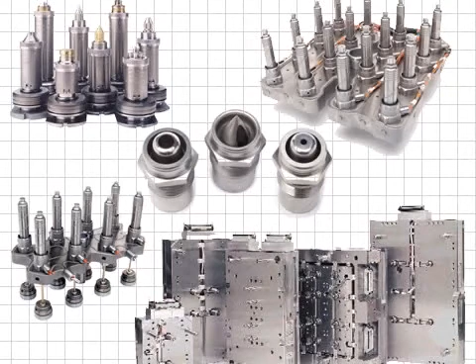In this lesson, we will discuss the various nozzle and gating styles available in hot runner systems today, including the open or sprue gate, hot tip gate, and valve gate methods. We will also examine the methods used to control the temperature in the nozzle and gate area.

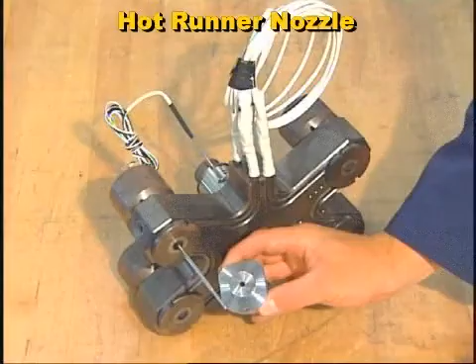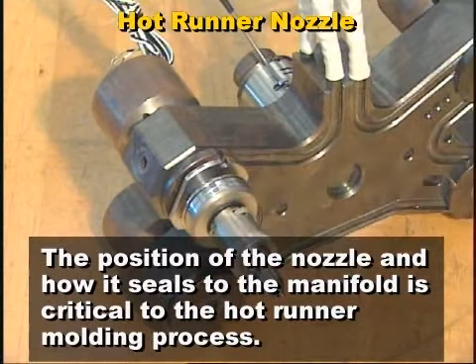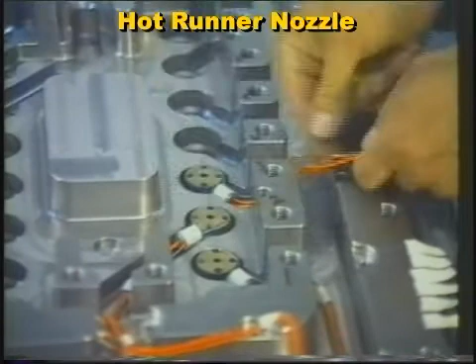The hot runner nozzle, also called the hot drop, is the connection between the manifold and the mold cavity. The position of the nozzle and how it seals to the manifold is critical to the hot runner molding process. If a nozzle is not positioned correctly, it can result in nozzle and gate damage, along with material leakage. Nozzle sealing is accomplished by spring force, thermal expansion, or by directly bolting the nozzle to the manifold.

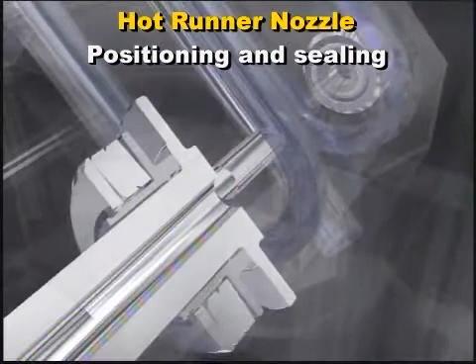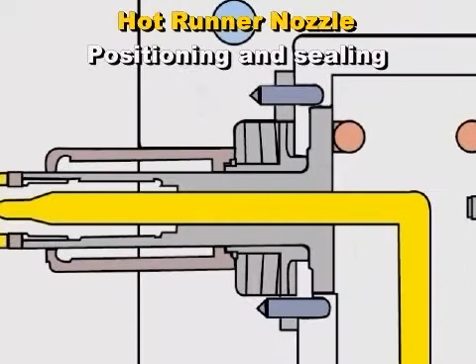Virtually all nozzles have some alignment feature, usually a high tolerance surface in the gate detail, used to ensure that the nozzle tip is aligned properly with the gate. During heating and cooling, the top of the rigidly attached nozzle moves as the manifold contracts and expands. There must be a robust seal between the nozzle housing and the manifold.

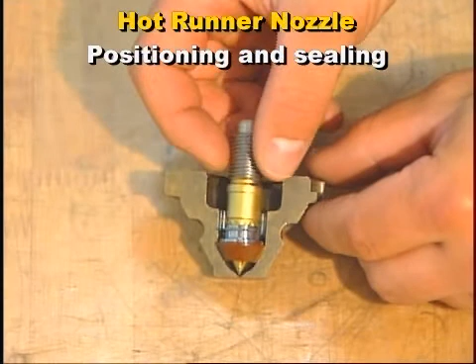Most hot runner nozzles utilize thermal expansion to provide the primary seal between the nozzle tip and the gate insert. Failure to run a hot runner at the recommended mold and nozzle temperature could lead to seal failure, resulting in damage or plastic leakage.

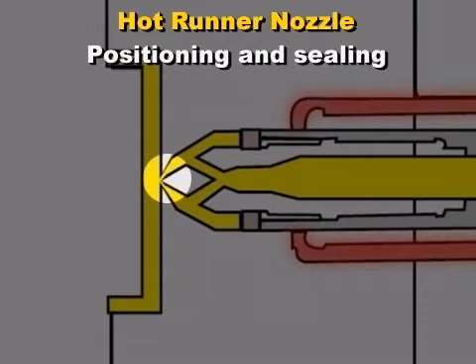The amount of thermal expansion is critical as it generates the force that prevents leakage between the nozzle tip and gate. Too much force may damage or deform the metal here. Too little and plastic leakage may result.

The nozzle must be heated to maintain the melt temperature. There are two primary techniques for heating the nozzle: indirect heat and direct heat.

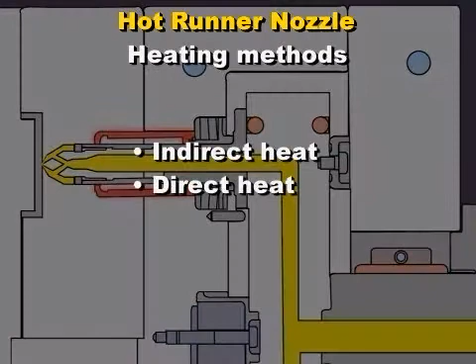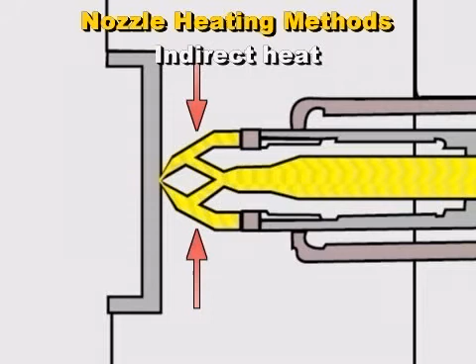If the nozzles or drops are heated indirectly, they do not have a specific nozzle heater, but rather rely on conductive heat from the manifolds as their primary heat source. Heat is conducted from the manifold metal to the nozzle housing to the nozzle tip. The nozzle material has to be highly conductive to transfer this heat efficiently.

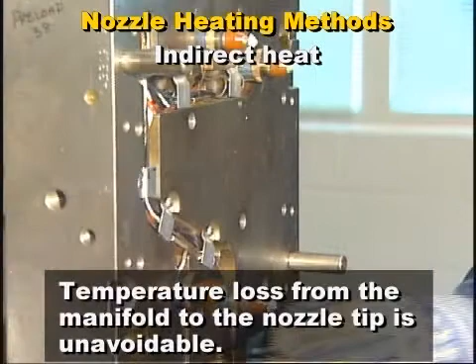Some manufacturers use heat pipes to improve the conductivity to the nozzle. These highly conductive inserts work to evenly distribute the heat provided by heaters in the manifold. With indirect heat, however, some heat loss along the length of the nozzle is unavoidable. This results in a lower temperature at the nozzle tip as compared to the base of the nozzle.

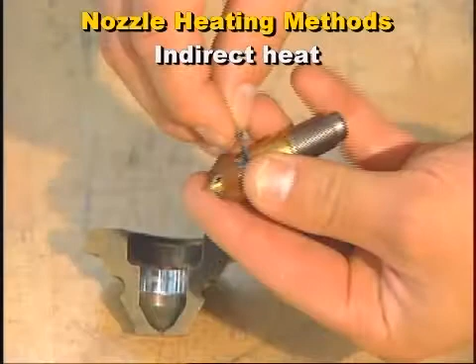In addition, the nozzles have to be insulated, especially in the tip region, to minimize heat loss to the cavity. Indirectly heated nozzles are recommended only when molding plastics with a wide processing temperature window, as precise temperature control is difficult.

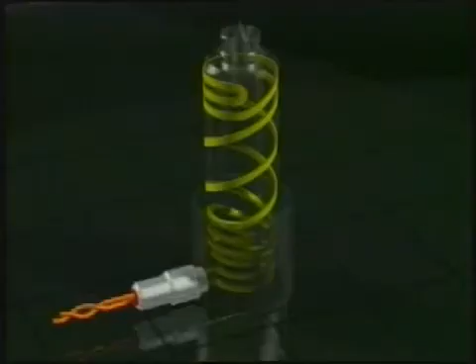Directly heated nozzles have individual heaters. This method of heating is extremely effective because within each drop, the temperature can be controlled right up to the nozzle tip to provide a higher degree of process adjustability and repeatability.

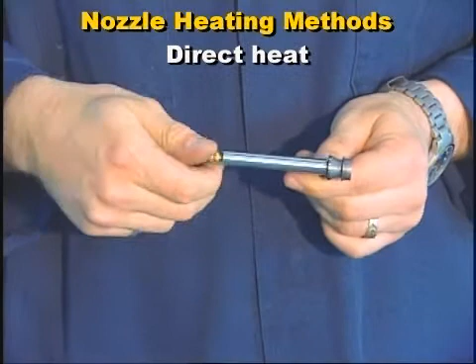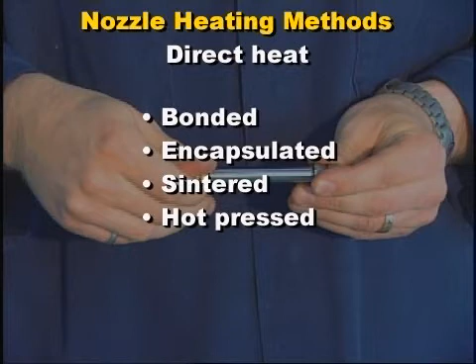There are several ways this heating element can be connected to the nozzle body. The element can be bonded, encapsulated, sintered, or hot pressed into a milled groove in the nozzle body. Some types of nozzles will have heater bands secured directly to the outside of the nozzle body. This contributes to good temperature uniformity.

Whatever the design, temperature uniformity in the nozzle is critical, particularly when molding engineering plastics with a narrow process window. Direct heating uses more heating circuits to provide separate temperature control of each nozzle, allowing the molder to fine-tune and optimize the process.

However, the additional wiring required for direct heated nozzles is more complex, presents more potential failure points, and can be more expensive than the indirectly heated nozzle type.

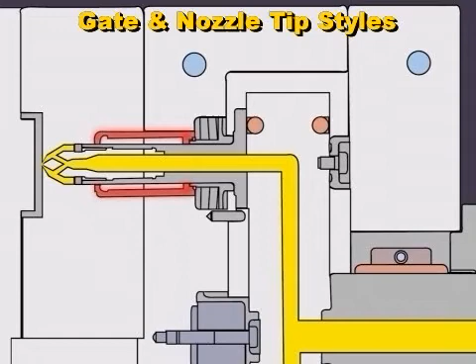The gate area is where the plastic part and the nozzle tip meet. The term gate is also used to refer to the specific type of nozzle design. There are two basic types of hot runner gates available: the open gate, also called a thermal gate, and the valve gate system.

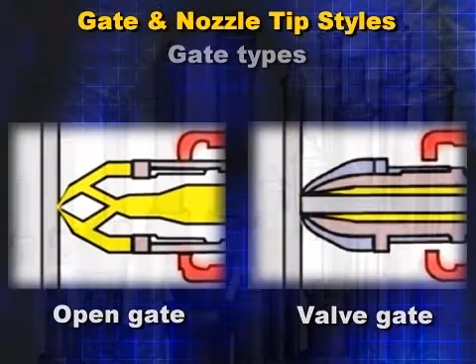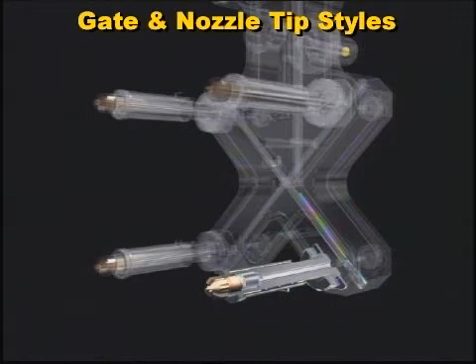Within these groupings, there are literally hundreds of gating options available, depending on the part design, material type, desired gate vestige, and other factors. The design and temperature control of the nozzle tip and gate area is critical in hot runner molding. Let's examine the characteristics of each gate type.

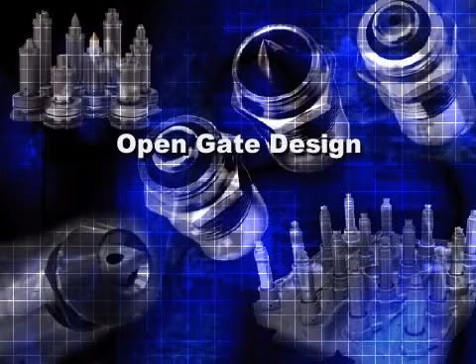The open gate design, sometimes referred to as a thermal gate, uses precise temperature control of the nozzle tip to melt the plastic in the gate each cycle. The gate remains open for plastic flow during the filling and packing phase of the injection cycle. Then, during the holding phase, the plastic within the gate cools sufficiently so that it freezes, acting as a plug.

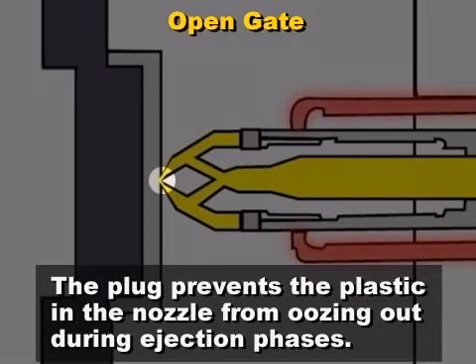This plug prevents the viscous plastic contained within the nozzle from oozing out into the cavity during the mold open and ejection phases. The gate is also the break-off point.

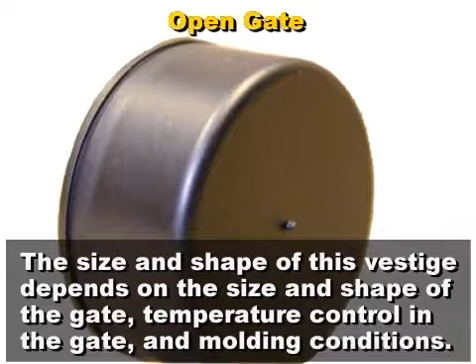At the time of part ejection, some of the gate material remains with the finished part and creates a vestige. The size and shape of this vestige is dependent upon the size and shape of the gate, temperature control in the gate, and the molding conditions.

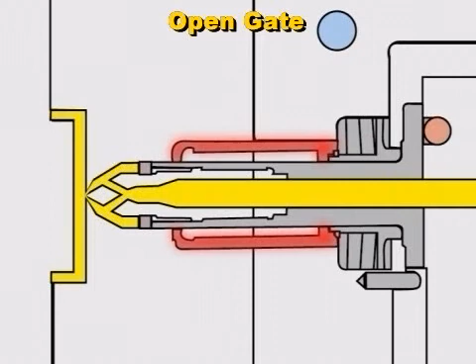When injection pressure is applied to the melt at the start of the following cycle, the rise in pressure forces the plug into the cavity, remelting it as the cavity starts to fill. Due to shear heat generation, the actual temperature of the nozzle tip will increase as the melt flows through it. This particular gate type is often referred to as a hot tip or pinpoint gate.

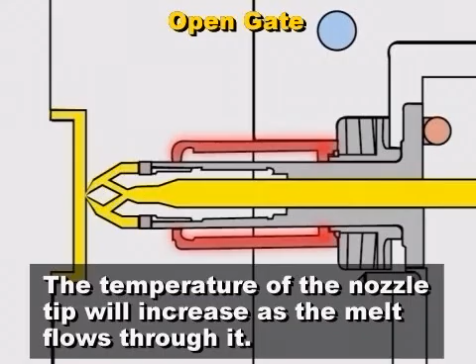The melt and nozzle tip temperature in an open gate system can sometimes be a difficult temperature control problem. The temperature of the mold steel and the hot tip can be several hundred degrees apart. It is often necessary to insulate this area to prevent heat transfer.

Titanium alloys are also used as a thermal insulator where low thermal conductivity is required. Designs that provide temperature insulation through air gaps or solidified plastic can be an alternative.

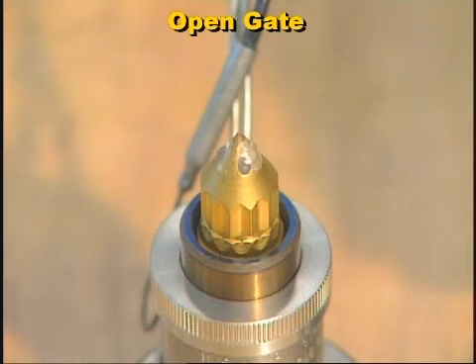Conductive materials such as beryllium copper are used to conduct heat from the nozzle heater to the tip and maintain the desired temperature at the gate. Selection is critical in the design of nozzle tip components.

Materials with low thermal conductivity are used where contact is necessary with the mold, but minimal heat transfer is desired. Materials with high thermal conductivity, such as copper alloys, are used to conduct heat from the nozzle into the gate area.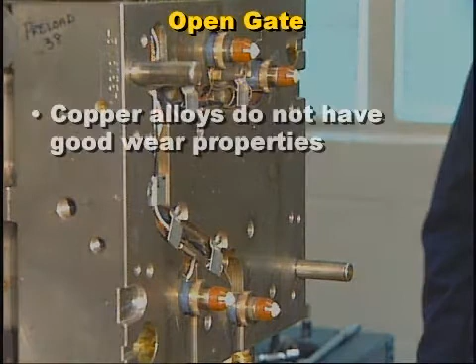Copper alloys, however, do not have good wear properties and tend to be worn away over time. Tungsten carbide alloys are used where good thermal conductivity is required in conjunction with excellent wear properties.

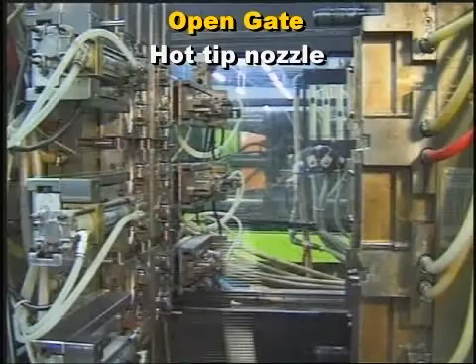This is a hot tip or pinpoint nozzle tip. It provides acceptable gate appearance for many applications. The hot tip is commonly used for caps and closure applications, but can also be used for larger parts.

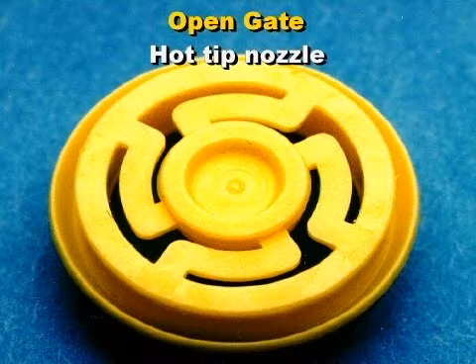This type of nozzle tip will typically leave a small gate vestige on the molded part. Smaller gate sizes will give reduced gate vestige, but will also subject the material to more shear and require increased injection pressures.

The hot tip relies on good nozzle tip temperature control as well as adequate gate cooling to optimize gate appearance.

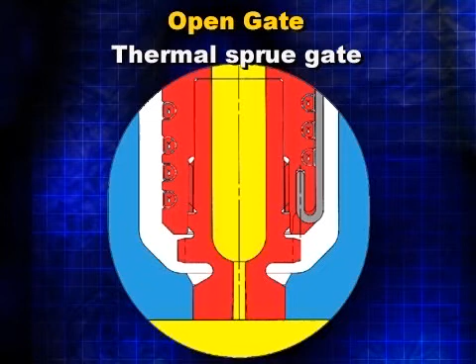The thermal sprue type gate, sometimes called a hot sprue, relies on cooling in the mold to freeze the gate. This will result in a larger gate vestige that looks like a small sprue.

The thermal sprue gate is commonly used to feed into subrunners or other components where gate appearance from the hot runner is not as critical.

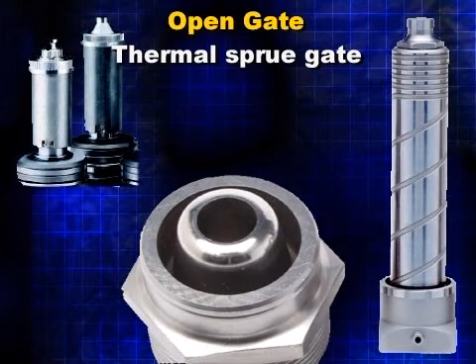It subjects the material to a minimum amount of shear heat generation and pressure drop. This type of gating is not recommended for materials that have a tendency to string, like polyethylene, polypropylene, and polystyrene.

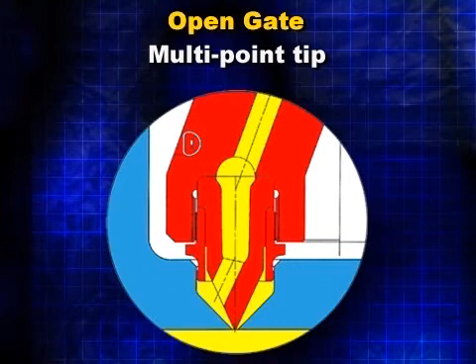The multi-point tip provides several hot tip gates from a single nozzle. These can be used to gate several parts, usually smaller parts, with one nozzle, or to provide several gates onto one part.

It is commonly used to mold components such as gears, where concentricity is critical. This gate type has only one zone of temperature control for several gates, which can limit processing options.

The edge gate or side gate method provides an open thermal gate into the sidewall of the part. The gate is sheared from the part as the mold opens. The part design must be suitable to provide a clean shearing action.

Good temperature control in the gate area is also required. A cold slug forms in the gate, preventing gate drool. On the next cycle, injection pressure forces the plug into the cavity, remelting it as the cavity starts to fill.

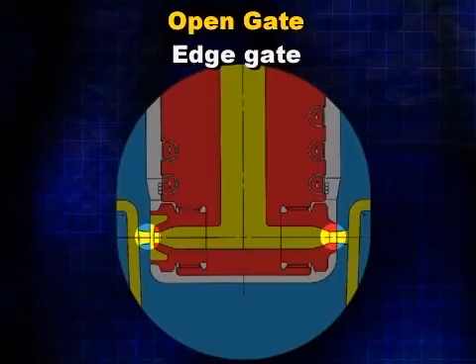The control of gate solidification is influenced by the properties of the plastic. For example, different gating techniques are required to process semicrystalline and amorphous plastics.

Semicrystalline materials have a higher melt temperature, so generally the nozzle must supply more heat to the gate area than for amorphous plastics.

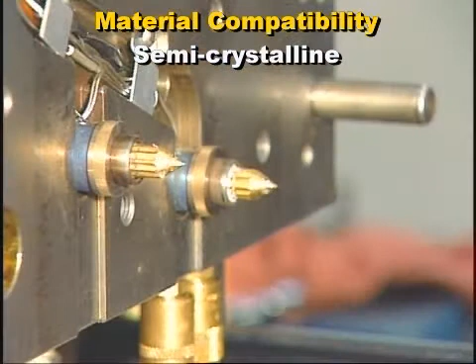Because semicrystallines melt and solidify with a narrow temperature range, it is important that the nozzle tip temperature be kept as constant as possible.

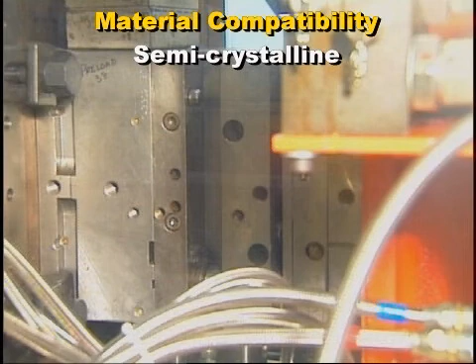If allowed to cycle above and below the melting point of the material, plastic may solidify in the gate. This is extremely critical when molding with a filled type semicrystalline material.

Common semicrystalline materials include polyethylene, polypropylene, nylon, acetal, and PET.

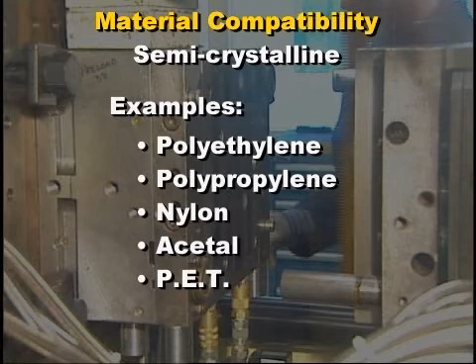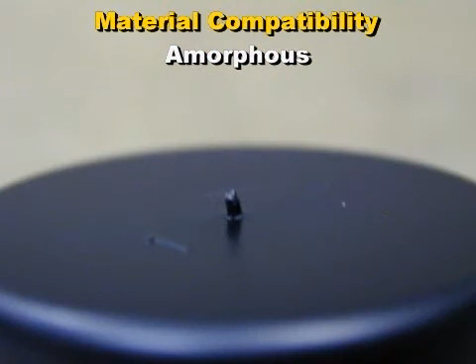When molding an amorphous material, the gate area should be thermally insulated from the nozzle and nozzle tip. Otherwise, heat transfer from the nozzle to the gate area will delay solidification of the amorphous material, leading to defects like gate stringing or increased gate vestige.

Common amorphous plastics include polycarbonate, polystyrene, and ABS.

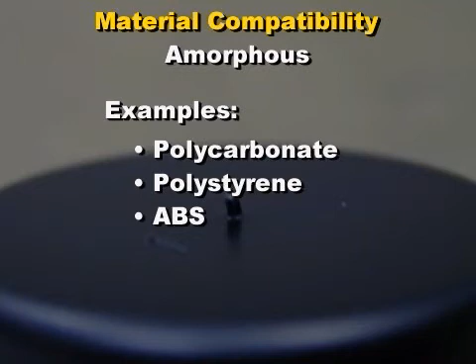Valve-gated hot runner systems offer the molder the optimum in flow control. The valve gate is often used for fill sequencing, processing foamed materials, gas assist molding, or where minimal gate vestige height is required.

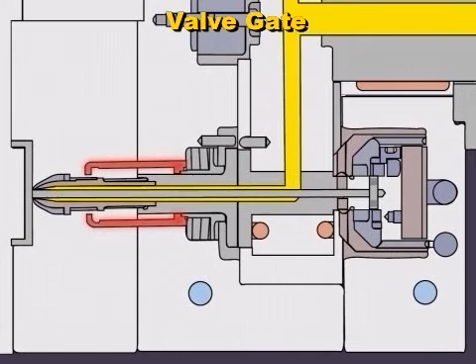A valve gate uses a pneumatically or hydraulically operated valve stem to mechanically open or close the gate. The gate opens at the beginning of the injection stage and allows the viscous plastic to enter the cavity.

When injection and packing are complete, the valve stem piston is actuated forward. This shuts off the resin flow and the tip of the valve stem effectively forms part of the cavity surface.

The result is a circular gate vestige, the same size as the gate diameter, that looks similar to an ejector pin witness mark.

The valve stem tip never actually makes steel-to-steel contact. There is always a thin film of plastic left between the pin and the gate.

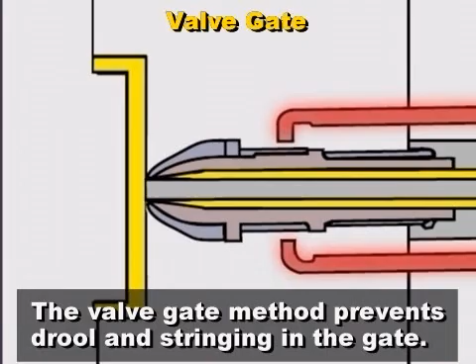The valve gate method also prevents drool and stringing in the gate. In addition, the physical properties of the molded part are improved with the use of a valve gate.

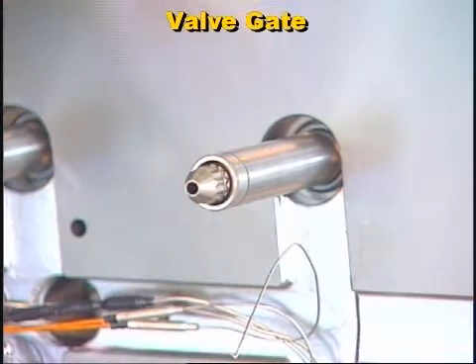Due to the larger gate opening, valve gates provide easier part filling and generate less shear than thermal gates. Also, the holding pressure can be applied and controlled for a longer period of time, resulting in more uniform packing. The result is a part with less warpage and improved physical properties.

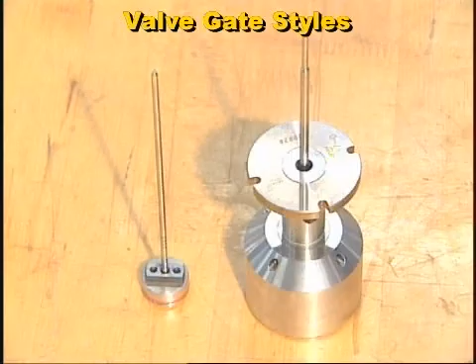There are two basic types of valve gate seals, tapered and cylindrical. Each type has a different method of sealing the gate.

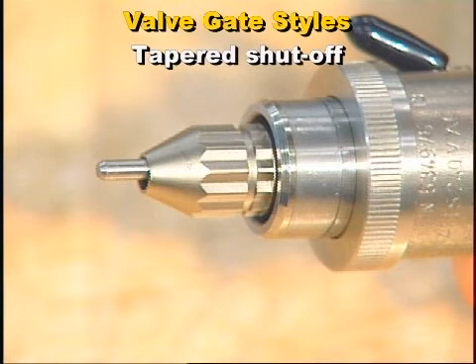Let's first examine the tapered shutoff system. Here, the tip of the valve stem is ground at an angle that seals to a matched angled surface in the gate insert.

As the valve stem moves forward, the melt caught between the valve stem and gate steel is compressed and forced to flow out of the gate. A seal is formed between the valve stem tip and the gate insert.

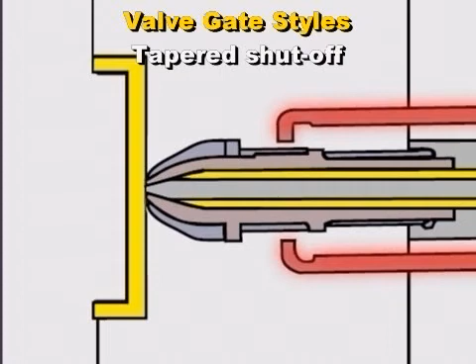The forward stroke of the valve stem must be limited with a physical stop to prevent damage to the gate insert from the valve stem hitting it.

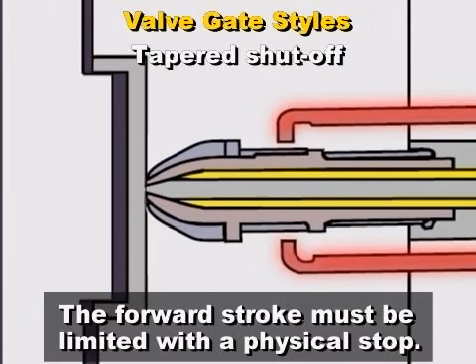With a cylindrical valve stem seal, the valve stem creates gate shutoff without metal-to-metal contact with the use of a tight tolerance slip fit in a cylindrical gate.

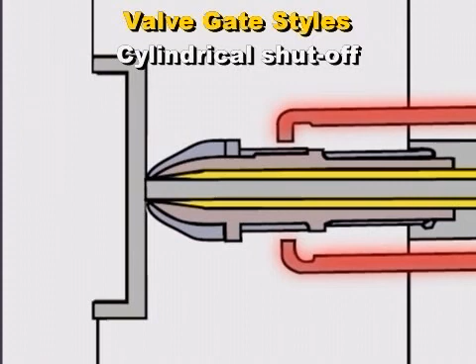When the stem moves forward, it acts as a plunger, forcing the melt from the gate opening into the cavity. This gating style relies on the tight tolerance between the valve stem and gate opening for the superior gate quality.

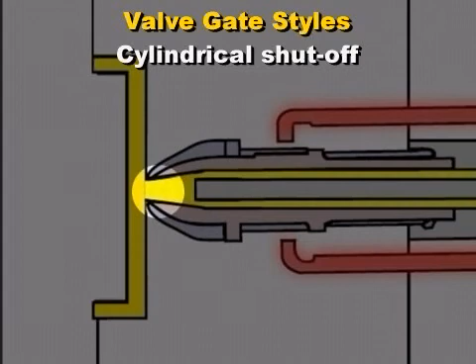This feature also minimizes any gate wear and allows up to 10 million shots without any gate repair. Besides minimized wear, the cylindrical type shutoff allows for unsurpassed optical gate appearance.

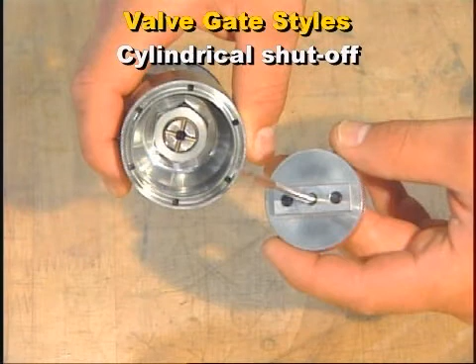The cylindrical sealing, however, is more sensitive to wear if the required tolerances are not maintained, causing rapid degradation in gate quality as the wear increases the size of the gap between the valve stem and the gate steel.

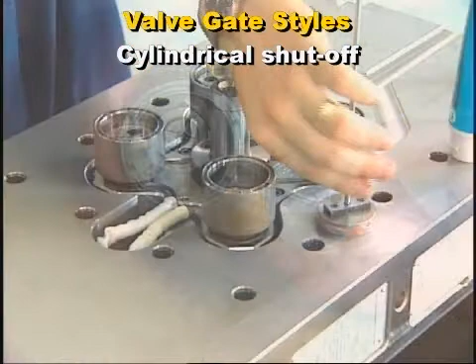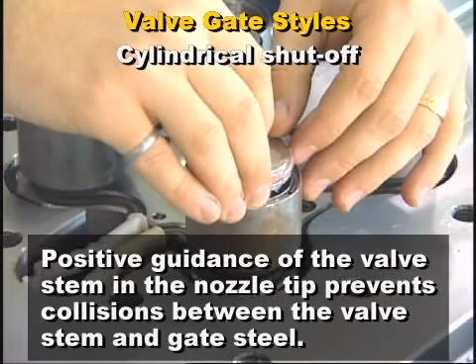Therefore, cylindrical seal valve gates require precise alignment of the valve stem to the gate in order to reduce wear. Ideally, positive guidance of the valve stem in the nozzle tip prevents collisions between the valve stem and gate steel.

Valve gate nozzles can also reduce cycle time, especially when molding large parts. Since the valve, and not the molding machine, holds pressure on the cavity, you don't have to wait for the gates to freeze, and melt plastication can begin sooner.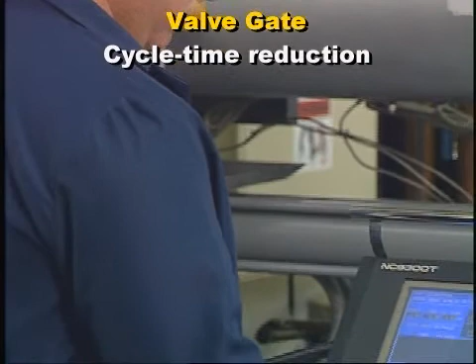With the open or thermally gated nozzles, the gates must be sufficiently frozen before hold pressure can be released and screw recovery can begin.

This difference can add several seconds to the cycle time for thermally gated parts with large gates. Also, the valve gate's lower shear rate in the gate area minimizes shear heating of the melt, reducing the part's cooling requirements.

Sequential valve gating is the independent control of valve gates in a mold. The precise timing of the opening and closing of the valves can eliminate weaknesses or weld lines or control their location on the molded part.

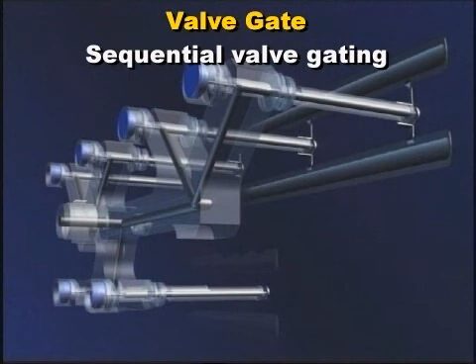Sequential valve gating is also used to control the filling of parts with dissimilar mass, like family molds. Each valve gate is independently opened and closed at a predetermined event, for example, time, screw position, or cavity pressure. This will provide complete control of cavity filling.

Valve gate nozzles can be especially useful for thin wall molding. Rapid fill rates, high pressures, and fast cooling characterize thin wall molding applications.

Rapid fill rates, in the range of a half second or less, are often necessary to fill the cavity before the frozen layer thickens and prevents further cavity filling.

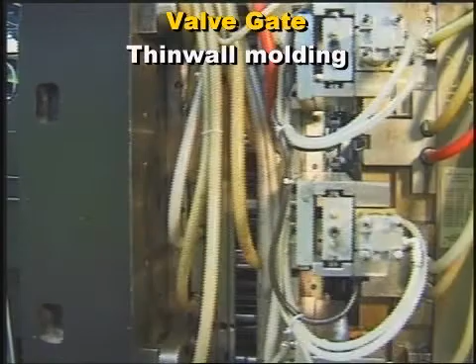The large gate diameters with reduced flow restrictions allow fast filling while minimizing pressure drop and shear heating.

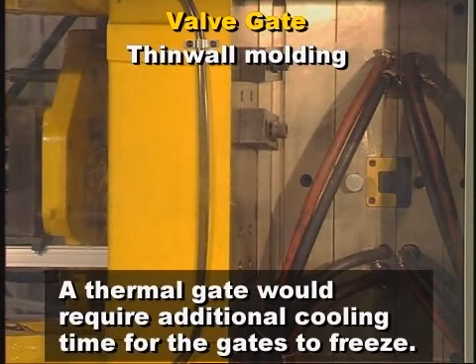In many thin wall molding applications, rapid part cooling permits the valve stem to close immediately after the cavity is filled. A thermal gate would require additional cooling time for the gates to freeze.

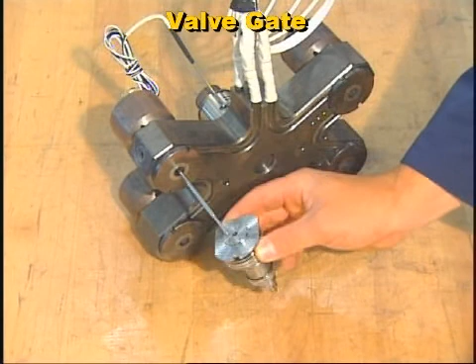Valve gates have been successfully used with abrasive plastics containing fillers such as glass and carbon fiber. However, care must be taken that wear-resistant materials are used for the valve stem and nozzle tip. Tapered valve gates are more often recommended for abrasive applications.

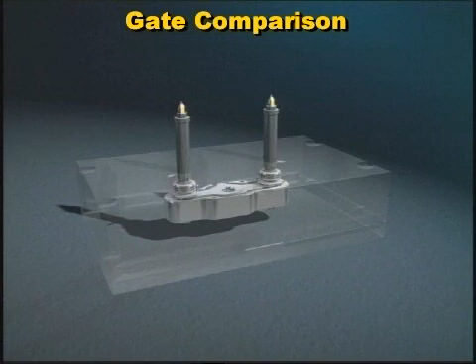Different types of open or thermal gates have different types of processing characteristics. Open gates with large orifices are best suited for filling large parts and molding with abrasive materials because the pressure drop and shear stresses are low.

Open styles with smaller orifices have higher pressure losses and shear rates and are more susceptible to wear.

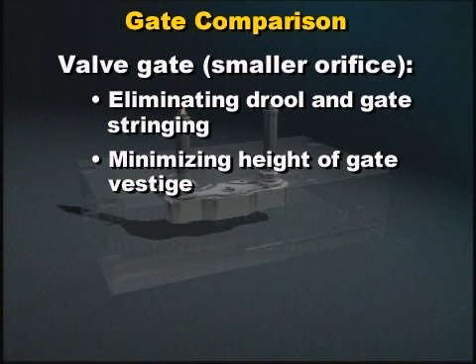The valve gate method is best for eliminating drool and gate stringing and minimizing the height of the gate vestige. In addition to the superior gate quality, valve gate nozzles can improve the part's physical appearance and increase productivity.

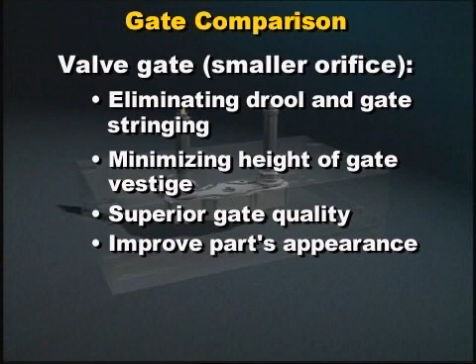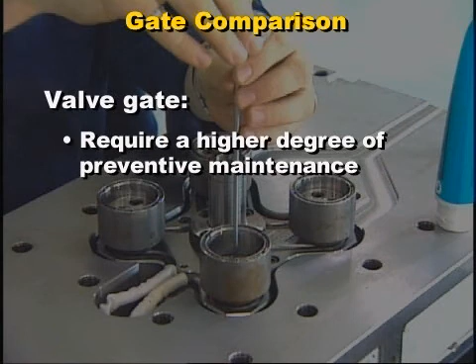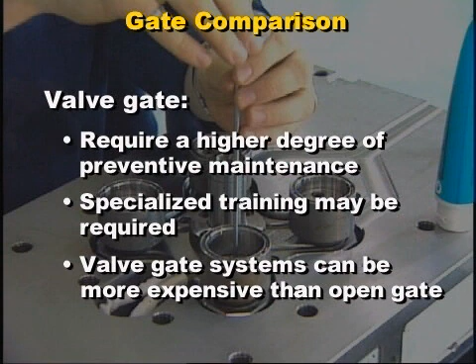However, valve gates have moving parts and will usually require a higher degree of preventive maintenance than open gate systems. Specialized training may also be required to properly operate and maintain a valve gate hot runner system. Valve gate systems are also more expensive than the cost of a thermal gate design.

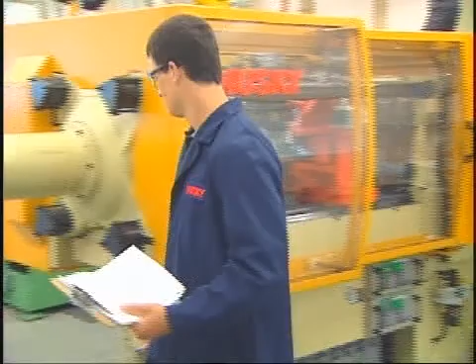In this lesson, we examined the various nozzle and gating styles available in hot runner systems today. In the next lesson, we will describe how the temperature is controlled in the nozzle and manifold of a hot runner, as well as discuss some common hot runner applications.